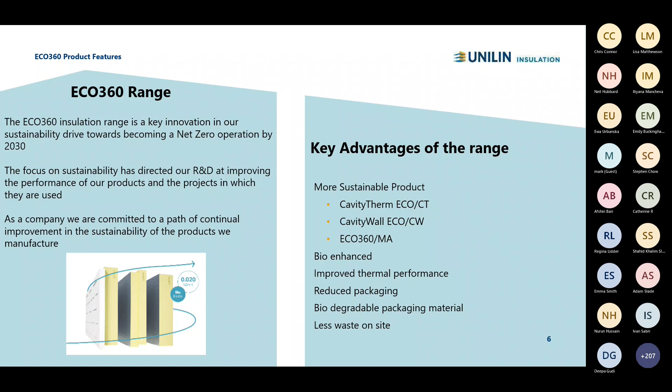We'll go into environmental product declarations in further slides when we link it through into embodied carbon, but these things can be sourced from a manufacturer. They must be independently third-party assessed. When you're using a life cycle assessment, an EPD must be available on the software that you use, and one of those examples is OneClick.

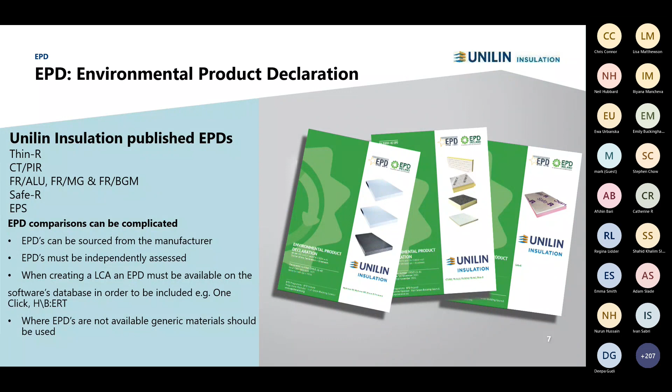OneClick are very similar to Revit, who won the BIM race. OneClick appear to be winning the race to house and be the platform for running embodied carbon targets. And where you don't have an EPD available, you must use a generic material score, and like most generic material scores, they're not very good.

So we'll go into Part L. We should all be fairly familiar with this. On the 15th of June of last year, it came into effect with a 1-year transitional period. It was 31% lower carbon emissions than previously in the 2013 regulations. And through SAP 10 itself, we've got a primary energy target, which is new to us.

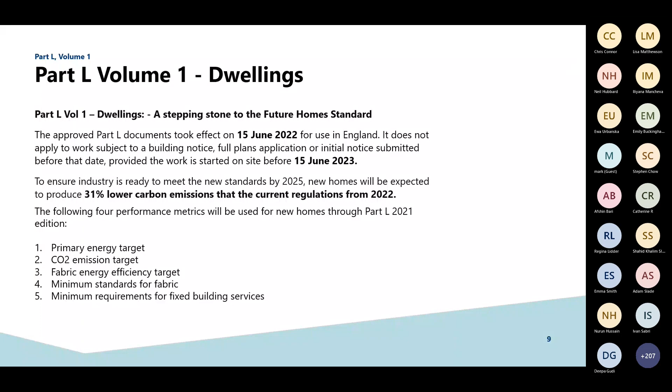We've got the CO2 emissions target, which has been reduced, the fabric energy efficiency target, which has been reduced, the minimum standards for fabric, and then fixed building services as well. So we'll touch upon those just now.

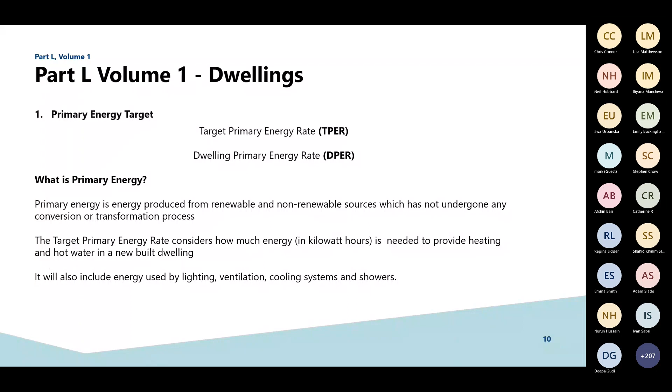So the primary energy target, so it's new to us. It's measured in kilowatt hours per square metre per year, and it's the primary energy used by a dwelling for its heating, lighting and hot water, and it can be influenced by things like the building fabric, and there's other factors like boiler efficiencies and renewable inputs.

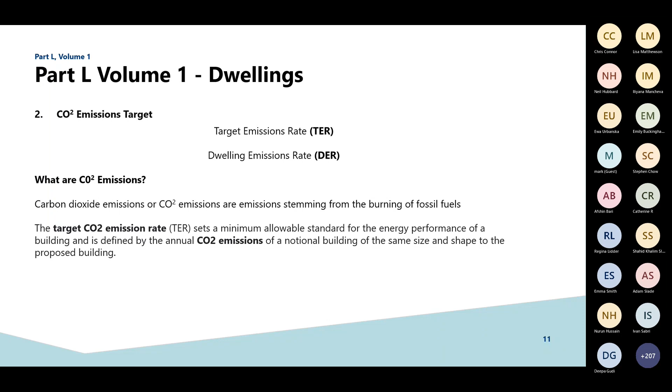We've then got the CO2 emissions target, which is measured in kilograms of CO2 emissions per square metre per year. Again, this has been with us since the concept of SAP from a compliance point of view. And again, I think we can all accept that reduction in CO2 is the primary objective when improving our building stock, as it contributes so massively towards global warming itself.

Then we've got the fabric energy efficiency standard. So this again relates to really the fabric first approach. As an energy assessor myself, and if there's any on the call, this really is the starting point when you start looking at SAP from an energy assessment point of view. You can then start to look at the CO2 and the primary energy, which again are a lot easier. So again, it looks at the energy, looking at the fabric.

So the more energy that's used to heat it, the worse it is. So again, if you can reduce that fuel consumption with the building fabric itself, and it doesn't matter whether that comes from a clean source or not, it still has to be paid for by a consumer, which is really relevant at the moment, obviously, with rising energy bills. So the less fuel to heat the building, the cheaper it is to run, and therefore it becomes a major step towards the elimination of fuel poverty.

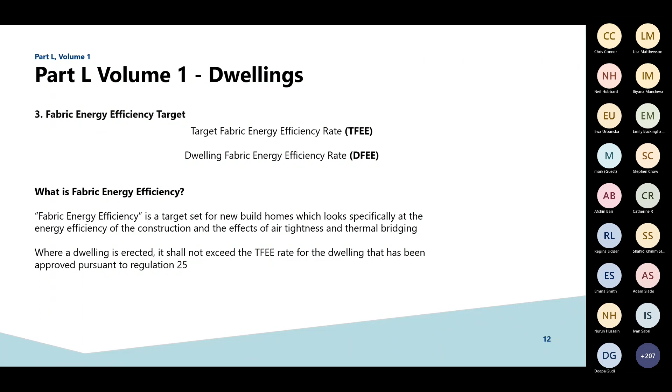So then you've got the minimum standards. So again, you can see they're listed on the table. These are absolute backstops, so I won't go through them all, but effectively they're in there as part of the recipe of SAP. If you've got something like a dormer cheek, which you want to look aesthetically pleasing, you can go as high as 0.26 in that as an external wall element. Very small area, it would be offset then against other elements. So by making the floor slightly lower, you can make the walls slightly worse. So it's a balancing exercise.

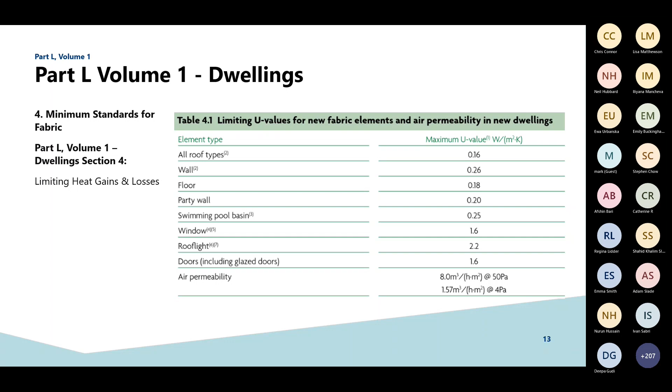And then you've got the fixed building services. So these include things like heating systems, where you've got boiler efficiencies and time and temperature controls, which are also set.

Y value of 0.05. So basically thermal bridging is measured in psi values, it's measured linearly. There's 44 junctions in total. So you've got things like the external wall ground floor junctions, lintels, sills, reveals, intermediate floors, eaves details. So all of these are measured linearly, and as a psi value, they get added together quite simply, and they form a Y value.

So we know that U values are fairly common. Everyone seems to know about them. They're repeating thermal bridges. The Y value is the non-repeating thermal bridges. As a total, it's a penalty that gets added in SAP in the background. So if you think you're achieving 0.15, but you've got a really high Y value, then your overall U value is a lot worse. The air tightness is 5, so that's remained constant throughout SAP.

We're still looking at mains gas boilers. Again, we're not quite ready to switch over, and I think that's more about getting the industry ready for commissioning and stuff. So we're still looking at gas.

We've then got wastewater heat recovery systems. So quite simply, they sit on the trap of a bath or a shower, take the waste and transfer the heat, coiled around what's going back into the system to heat it up. Therefore, it's like boiling a half-boiled kettle. Less energy is used to heat that water up. That then disperses down to the foul drainage.

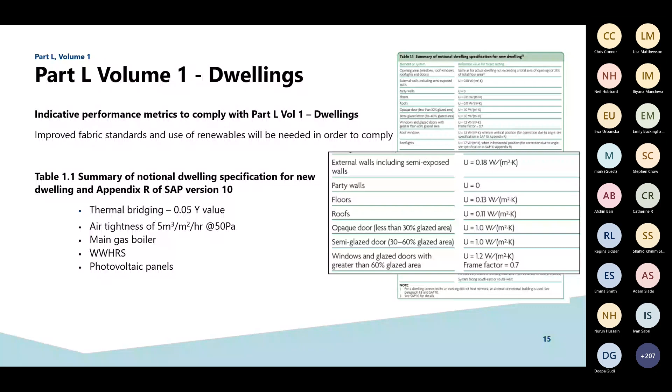But again, I must stress, from a fabric first point of view, when you look at the fabric itself with the BREL report, the Building Regulations England Part L that goes out as part of the SAP, if you fail the FEES, the fabric energy efficiency, after the building's been built, it's very difficult to comply. You can't use renewables or anything like that to offset. So again, it's about getting it right the first time.

So that introduces us to the Future Homes Standard. So what to expect for the future. The government has outlined their response. There is a consultation period now in 2023 with the legislation published in 2024 and implementation in 2025. We had 2013 in April 2014. We've had 2021 in June 2022. So hopefully these standards and targets can be met, but there is some history behind delaying them slightly.

So they are expected to be 75 to 80% lower than Part L 2013. They expect to do that through high levels of fabric standards and low carbon heating systems. It is subject to further consultation, but the use of gas, oil and LPG heating systems, as part of the removal of fossil fuels, will no longer be permitted. They will reduce the primary energy, CO2 and fabric energy efficiency targets, and then they'll review the minimum standards for the fabric and fixed building services.

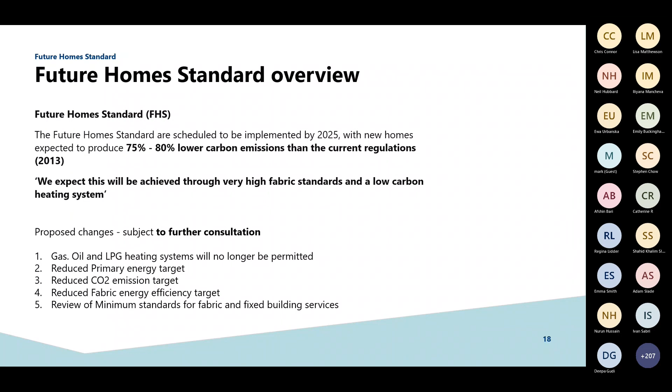So when they talk about the Future Homes Standard, they talk about heat pumps. When they mean heat pumps, they talk about air source heat pumps, which operate very, very well. The reason that they talk about air source over ground source and water source is it's a cheaper capital cost, not necessarily the most efficient overall, but it's a cheaper capital cost, and we tend to look at that first.

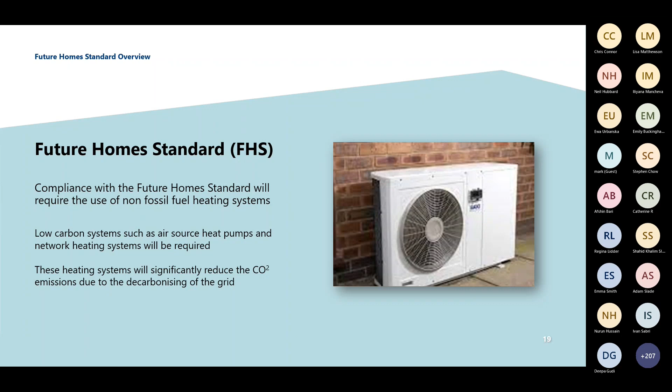So they have a draft notional specification. You've got a floor U value at 0.11, so slightly reduced. The external walls at 0.15, again slightly reduced. The roof remaining the same at 0.11, which is quite a significant challenge in both flat roofs and pitched roofs along the rake of the ceiling. You've got windows at 0.8, so going down to triple glazing. You've got doors that remain constant at 1, as does the air permeability.

The heating appliance going down to that heat pump system. The emitter type, so how the temperature is distributed for a room, goes to low temperature to suit the heat pumps themselves, which work typically well below 45 degrees. Natural ventilation, which remains standard, no PV at the moment, and no wastewater heat recovery.

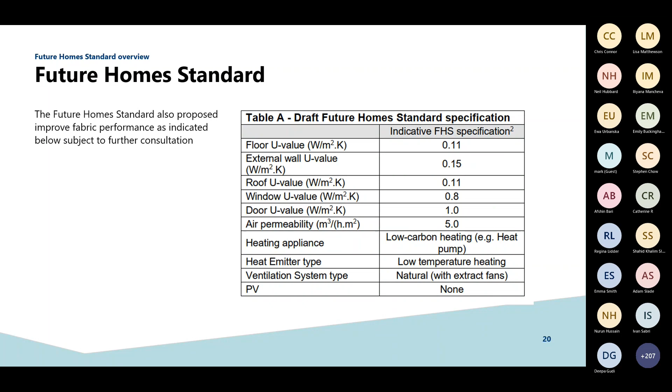So a comparison. I don't want to talk too much about zero carbon homes in 2016, which never happened, but Part L 2013, Part L 2021, and the Future Homes Standard of 2025 are relevant. So you can see that 0.13 to 0.11, if we're talking PIR, it's a 25 mil increase to get to 0.11. 0.18 to 0.15 is the same in PIR from a partial fill or a full fill point of view. From a roof point of view, we've gone from 0.13 to 0.11 in Part L 2021.

So we mainly insulate through the bottom chord of ceiling trusses typically. So that mineral fibre is built up, or if it's for a pitched roof, it can be up to about 400 mil, depending on where the insulation line sits. Windows, you've got going from standard double glazing to triple glazing, doors at 1, air permeability constant at 5, the low carbon heating system coming in, so air source heat pumps.

The emitter has already changed in 2021, and with things like retrofit, we're going to get used to retrofitting. So if we're going to be installing low carbon heating systems from a retrofit point of view, we have to consider how the emitters are working. Radiators have to be upgraded and perhaps even doubled or times 2.5 in size to accommodate the low temperatures that run through them, or underfloor heating, which works on that from day one.

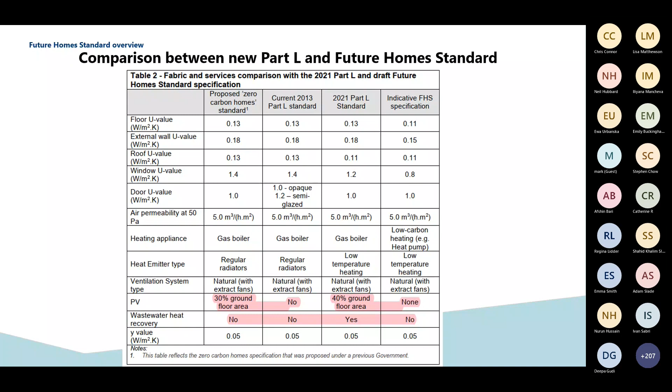The ventilation is standard. PV really only comes into effect in 2021. Whether we see it in the Future Homes Standard, it looks unlikely, but it will complement the air source heat pump and the electrics for everything else.

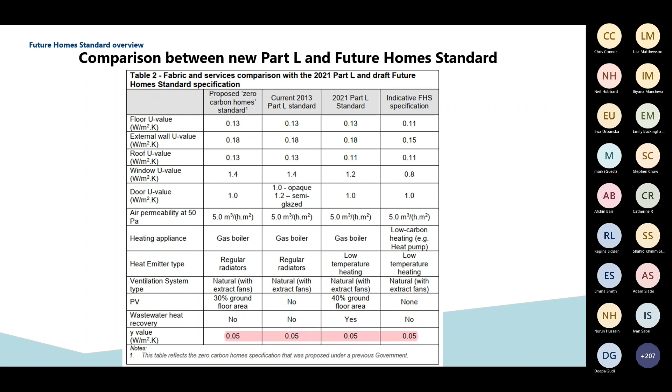There's no wastewater heat recovery beyond 2021, and then your Y value remains constant at 0.05, so a relatively good Y value. So again, looking at the details that we have available on the system, in a standard 2-story house with a truss roof, you can generally get down to about 0.03 or slightly lower. Just again on that, 0.01 or less is deemed passive house and no bridge.

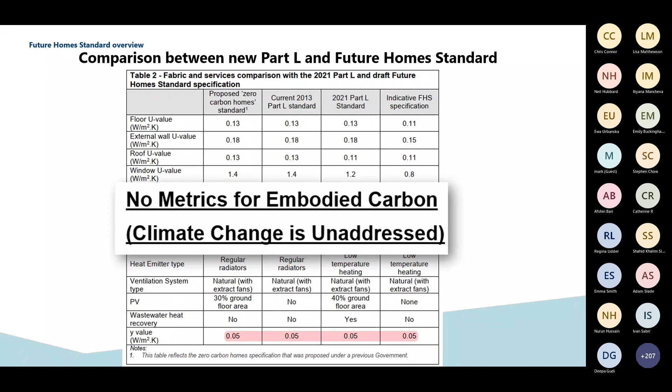So there's no metrics for embodied carbon. So we're always looking at an operational carbon point of view. So the climate change remains unaddressed. So again, that's an introduction to the operational carbon, which leads us into talking about embodied carbon. So introducing it as a metric.

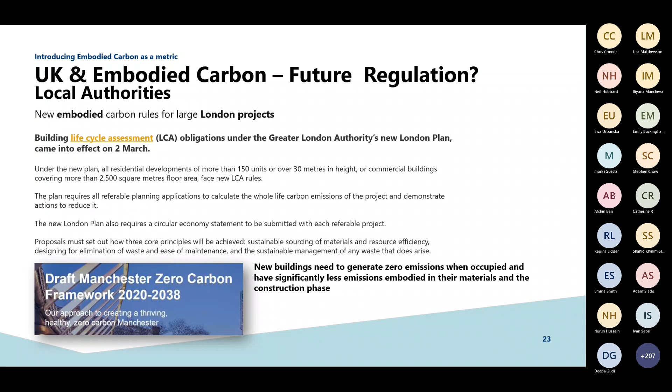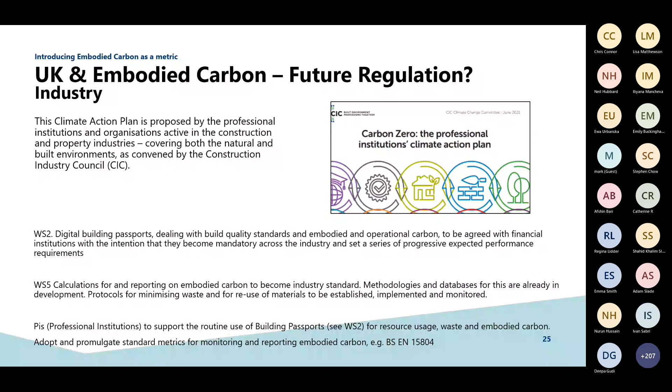I'll skip over these, but you've got the Greater London Authority, the Manchester draft local plans. There's the UK Environmental Audit Committee, and then you've got the Construction Industry Council as well. Everyone's talking about embodied carbon. I just came off the UK Green Building Council's presentation at 11 o'clock today. Government have committed to a Part Z regulation in embodied carbon. So again, it's a hot topic.

So they've gone on from this. They brought out version 2 in July of last year, and they were aligning themselves with LETI, the Greater London Authority, the UK Green Building Council, IStructE, the Royal Institution of Chartered Surveyors. So it's a collaboration. They were making sure they were getting this right. They looked at the future home standards from an operational carbon point of view to incorporate that within the method as well.

They have targets: residential, commercial, educational, industrial, mixed. So all of the targets change slightly depending on the use of the buildings. They've set out operational energy at less than 35 kilowatt hours per square metre per year. They've then got embodied carbon at under 625 kilograms of CO2 emissions per square metre. And this is one of the big changes that we saw in version 2. Version 1 had that at under 300.

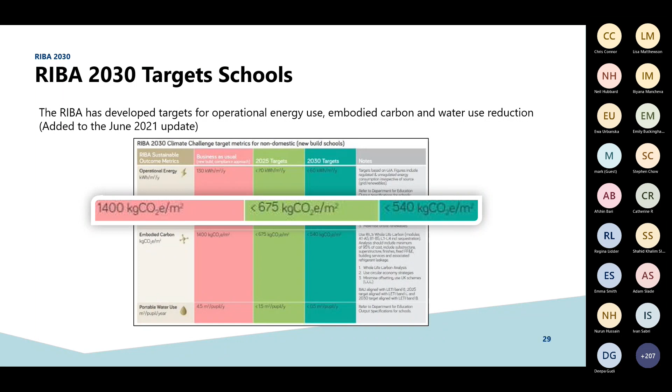So the delivery period itself: one thing we don't do when we measure SAP is look at any post-occupancy testing. It's not a compliance regulation. So things like insulation not installed, or things not working efficiently, could all be missed. So having this 1 year summer-winter cycle of data submission is really good. They are talking about making it longer, and it links to habits. So it's good finding out how somebody's using a system.

Perhaps they're using the air source heat pump in the wrong way, in which case it's not working properly, and therefore the energy efficiency isn't as set out. You can then educate somebody as to how to use it, and that typically takes a little bit longer. So having a longer period isn't a bad thing. Things like Passive House also have post-occupancy testing, but typically with a SAP compliant building, you wouldn't expect to do that.

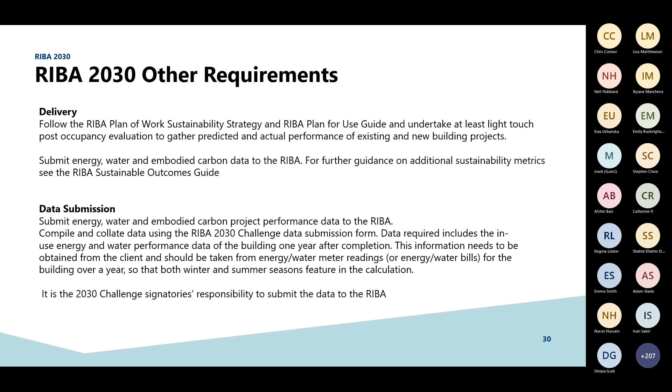So just looking at operational energy and the definition, it's measured in kilowatt hours per square metre per year, and it can be taken from confirmed energy bills or more advanced metering systems. That's the easiest way. The RIBA Climate Challenge does allow you to use both grid and on-site renewables. So for example, you can use PV generated on-site to meet those targets.

And again, whilst we're talking about them, we're talking about here net zero. So we're talking about offsetting measures that are set out within the challenge. And you wouldn't be offsetting.

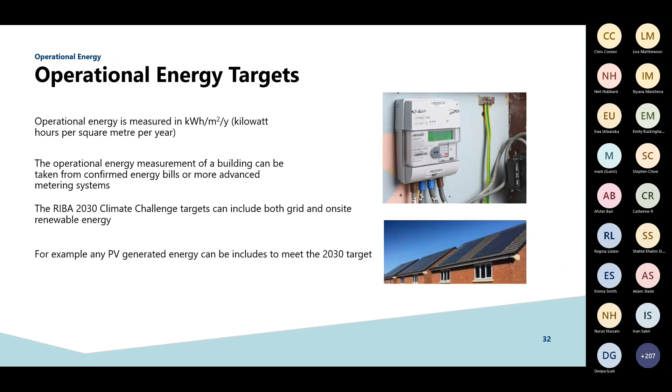So again, we do go on to say, as part of the RIBA Sustainable Outcomes Guide, effectively, if you're looking at a design stage, you can use things like SAP or PHPP. So SAP is obviously what we'd use from a building regulations point of view. The PHPP is the Passive House version. Again, this is just at design stage to estimate the demand, but they do go on to say that in the case of space heating, that demand should be between 15 to 20 kilowatt hours per square metre per year allowed for in the design itself.

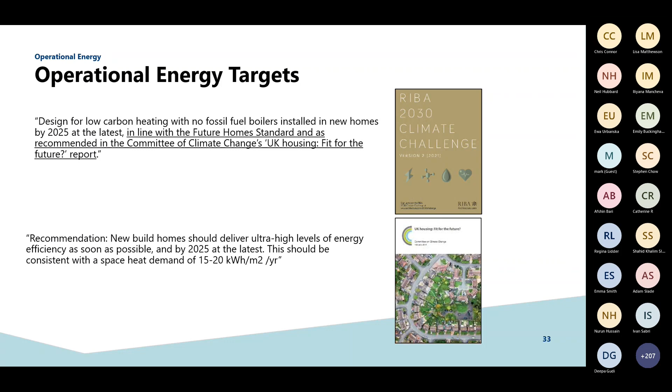So just looking at embodied carbon and embodied energy definitions, there's a common misconception when we look at embodied energy and embodied carbon. So embodied carbon itself looks at the sum of CO2 emissions associated with a product or service, as per the below there, looking through raw materials, manufacturing, packaging, distribution, use, disposal in that cycle. We quite regularly see that cycle linked to embodied energy, though, which it doesn't relate to, which is the sum of energy in kilowatt hours to produce a product or service.

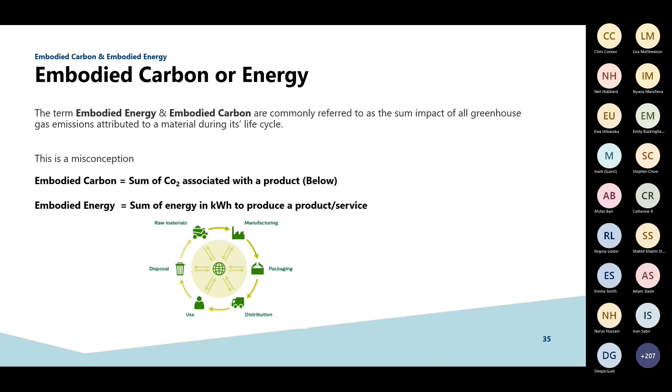But just to understand embodied carbon emissions, they're generated from the processes that are associated with sourcing materials, fabricating them into products and systems, transporting them to site and assembling them into a building itself. They also include the emissions due to maintenance, repair and replacement, and they include the final demolition and disposal stage.

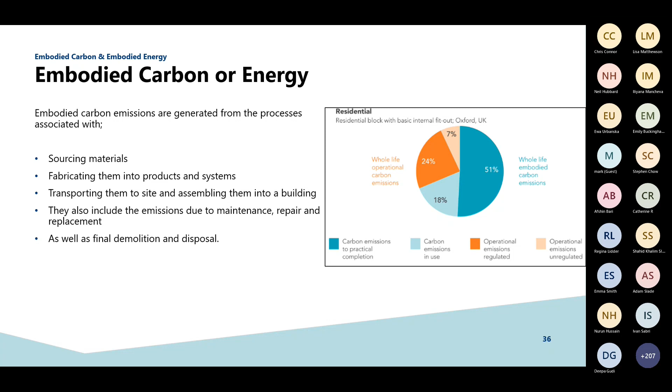Ordinarily, if I was with you guys right now, I would do a show of hands. I like to interact. It's such a good topic, but such a long amount of slides. But what I would say is, forget your businesses for a second. As an individual, does anyone on the Teams call know what their carbon footprint is? And I don't expect anyone to know that entirely accurately, but an idea.

So again, there's various apps that you can use. The WWF have one, the Tree app have one, and it's a way of simply understanding where you sit on your carbon footprint compared to the rest of the UK and compared to the rest of the world. It's just one of those things, when we talk about a climate challenge and all of the obstacles in our path, they've actually calculated, quickly, it takes about 3 or 4 minutes to calculate where they are approximately. So it'd be interesting if anyone on the course has done that, or during my presentation, whether anyone does it. Mine's 11.07, just to give you an idea.

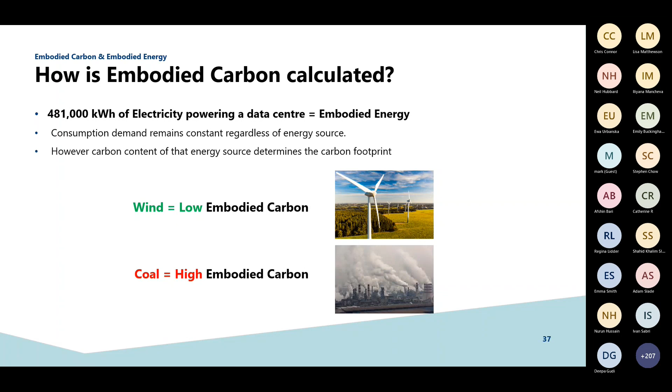As a responsible manufacturer, we're constantly developing ways for recycling our products, but as an example, you take a roof timber out of an existing building, and that gets chipped down, gets put into being something else. That's cradle to cradle.

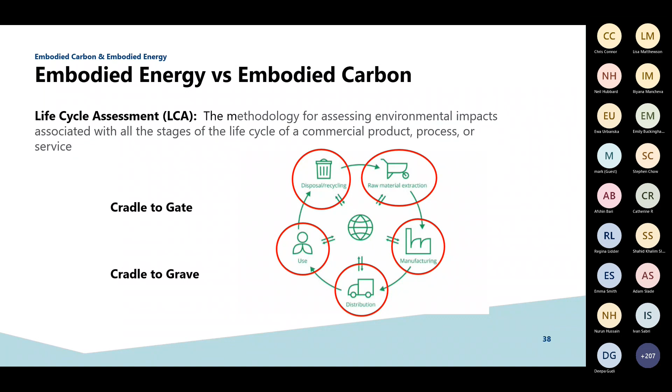When you've got cradle to cradle certified, that goes beyond that stage. So the best example of that is like a piece of stone that goes into a wall. It can come out of a wall at demolition stage and go into another wall in the same process without having a process in between to change that product itself.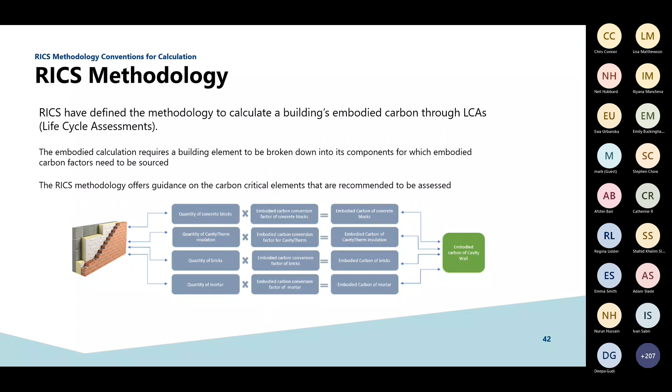You times them by the embodied carbon conversion factors in the EPDs, the GWP score, and that equals the embodied carbon of that element. You then add them together, and that's the total embodied carbon element of the wall. The categories that you have are then added together, and they're divided back by the gross internal floor area to give you the total embodied carbon. So again, you can see substructure, superstructure. The components are then split down into subcategories.

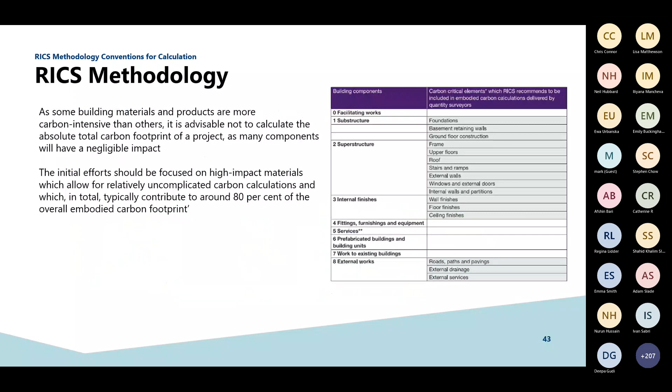So we're just going to have a quick look at LETI, referred to as the Low Energy Transformation Initiative, previously London. So the biggest mistake that they made with that was the word London. But again, this is more open. I'm going to mention the name again, but RIBA is restricted. It's restricted to architects and practices under RIBA.

LETI is open to engineers, planners, academics, housing association professionals, and so on, and CIAT and MCIOB. So they're more open from that point of view. They're not restricted to London, and obviously they do collaborate with others as well. They've split their carbon guidance down into two targets. You've got upfront carbon and then total embodied carbon.

So upfront carbon is A1 to A5, up to practical completion. This excludes sequestration itself. But you can see the targets are banded there. It looks a bit like the Green Guide used to with those targets. So there's set ways to improve those targets as well.

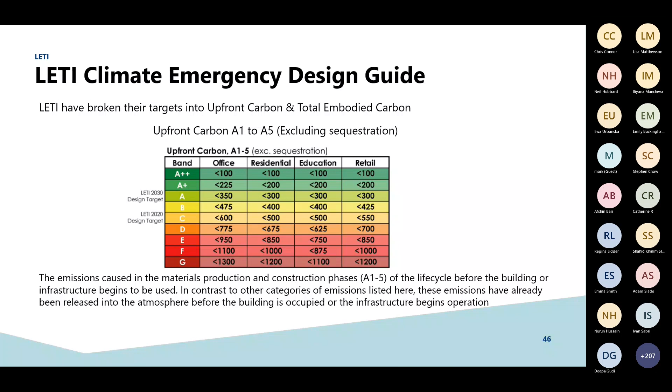Whereas you've then got the whole life embodied carbon stage, so A1 through to D, through to recycle, which can include sequestration. And you can see where the RIBA Climate Challenge sits. It sits at a band B there, under 625. As I said, it was previously under 300 as an A+. So there's obvious room for improvement there that can be made. And that's going to happen with all the good work that the industry is doing from a manufacturing point of view, going back into this from an EPD score.

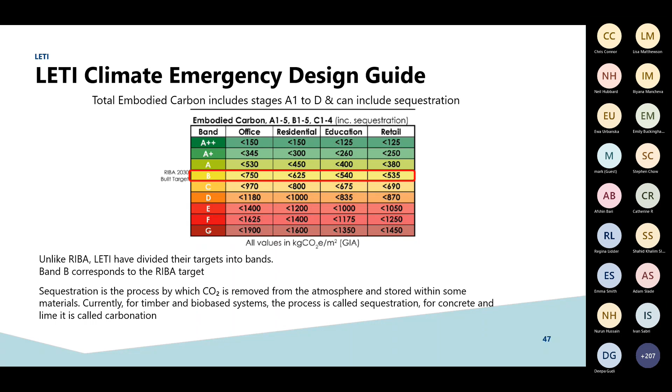So we'll have a look at those environmental product declarations now, EPDs as we call them, and their role in calculating embodied carbon. So they do measure the environmental impacts of a product for its life cycle. They're based over 100 years. It's done to EN 15804. It was A1. It's been changed to A2 in July of last year, which we're fully up to date on.

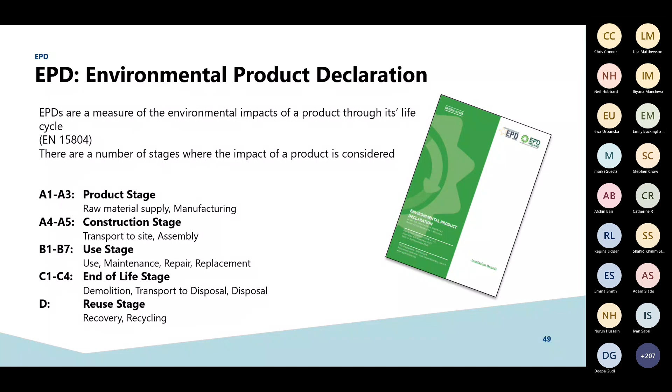And there's a number of stages that we talk about. So we talk about A1 to A3, which is the product stage, which is raw material supply and manufacturing. A4 to A5, the construction stage, so transport to site and assembly. B1 to B7, the use stage, which includes maintenance, repair and replacement. You've then got C1 to C4, which is the end of life, demolition, transport to disposal, and then disposal itself. And then a D stage, which is the recovery or recycling stage.

The main thing that you look for in an EPD is the global warming potential. So previously, before the EPDs took over from the Green Guide at the end of 2021, effectively they had a GWP score of less than 5%, and that typically looked at the blowing agent only, whereas it looks at the whole life cycle assessment now.

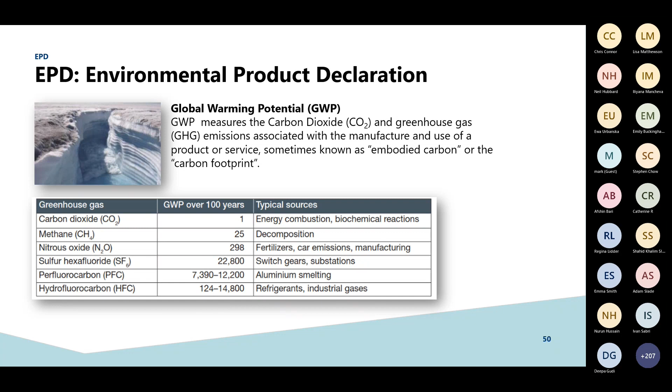So the GWP measures the carbon dioxide and greenhouse gas emissions associated with the manufacture and use of a product or service, sometimes known as embodied carbon or carbon footprint. So over 100 years, you've got a GWP score there of 1 for carbon dioxide. Things like methane, so again, rotting timbers or food or something, would be 25. You then got hydrofluorocarbons in refrigerants from 124 to 14,800. So there's a lot of work to be done there, and we'll talk about refrigerants in a minute when we link them back to air source heat pumps.

It also looks at the ozone depletion potential, the ODP. So previously that was a figure of 0%. Again, these figures are incredibly low. The decimal points move a lot, so 0.00000 before you encounter a number. So they are incredibly low, but they look at the ozone depleting gases causing damage to the stratospheric ozone layer, reducing its ability to stop ultraviolet light entering the Earth's atmosphere. So the GWP is the main thing you look for, but something else that might be known is the ozone depletion potential.

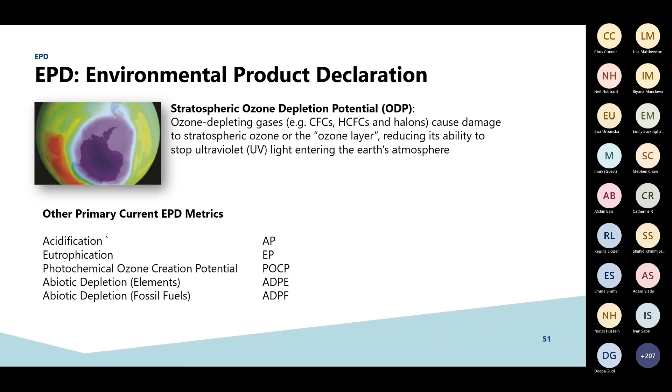Again, various questions when you look at EPDs, they're not that easy to interpret. They're not like a BBA certificate itself; they're specific to materials. They're specific to the manufacturer location of those materials. So you can't use an EPD score that comes from another factory when the materials come out of a different factory, because it all links back to processes within that factory itself and the efficiencies. They're not linear, so you can't readily change a thickness by dividing it back and multiplying it by the new thickness, which makes it complicated when people use thicknesses within an EPD that you can't buy in the industry. So therefore, the thickness is important when you do a comparison.

They tend to have an expiry over 5 years. So to get an EPD with a 5-year valid period, you have to have a year's worth of manufacturing data. You can say that you've got 90% recycled element within your product, but unless it's demonstrated within an EPD, it can't be used. You've got to go back to what an old EPD would say. So again, there's lots of good work going in. They cost about £9,000 per EPD, so it's quite a significant cost to doing them when you've got quite a vast range. So again, there's a strategic approach.

So you might not wait to the 5 years, but strategically, depending on what your maintenance plan is within your facility, perhaps you plan on putting a lot of solar on your roof. You wouldn't really want to put your EPD out until that work had been done, because it will impact things that go on. So again, there are people out there like ourselves that are doing significant work in the background, which will significantly improve the EPD scores.

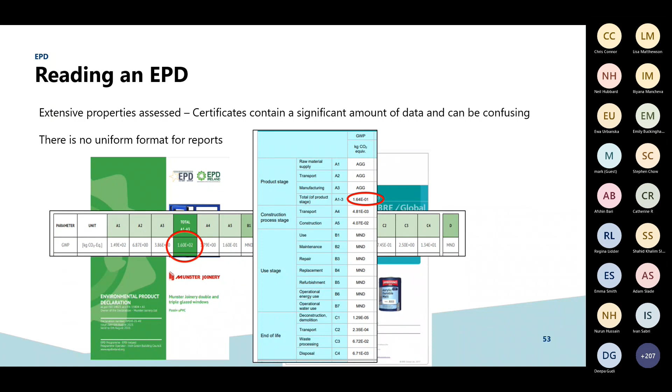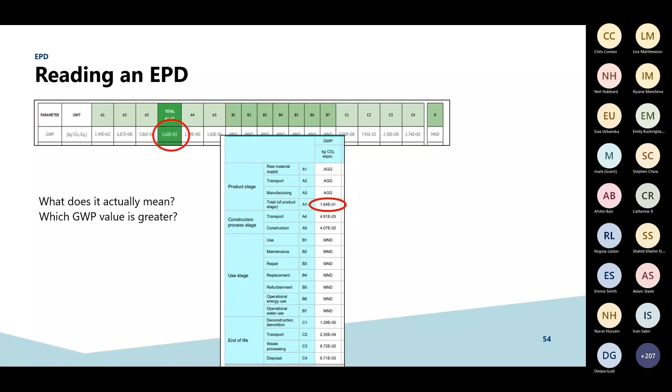So reading an EPD then, just looking specifically at A1 to A3, we've got two scores. I'll skip to the next slide. We've got two scores, which is 1.60E+02 and then 1.64E-01. And it's about the movement of decimal places. Normally I'd have a little bit of a guess around the room, but one's 160.2 and the other one's 0.164. It's about the power of and the moving of decimal places. We're looking at the GWP, but it's because of the ozone depletion potential, which has got that significantly low score, that's used.

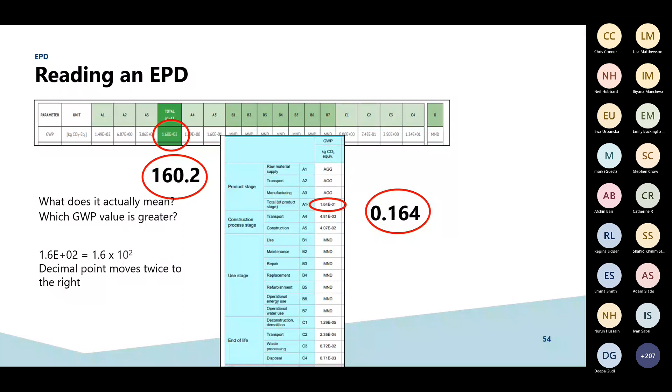So I've spoken to people like OneClick, and I've said to them, isn't it far easier to demonstrate the actual score, seeing as that's the most significant thing we're looking at, rather than making it overly complicated? But again, that's not going to happen. That's the way they're doing things at the moment. And it just makes them that little bit more difficult to read and understand.

So it brings us on to an independent assessment on embodied carbon that was commissioned. We did this with XCO2, who have backgrounds in engineering, architecture, and environmental science, and effectively what they were commissioned to do is look at the life cycle assessments in accordance with the RIBA Climate Challenge over 4 dwelling types: a detached, semi-detached, mid-terrace, and apartment block. And the aim was to see if we could achieve the RIBA Climate Challenge using traditional construction methods.

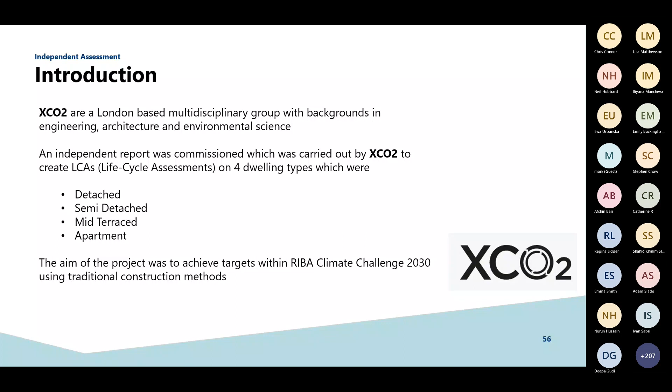And we started this process on version 1. So we were looking at under 300. And obviously when version 2 came out, it was a lot easier to achieve, but still quite onerous at the same time. So there's various standards that this assessment was created to, which again, you'll have a copy of, should anyone wish to look into it.

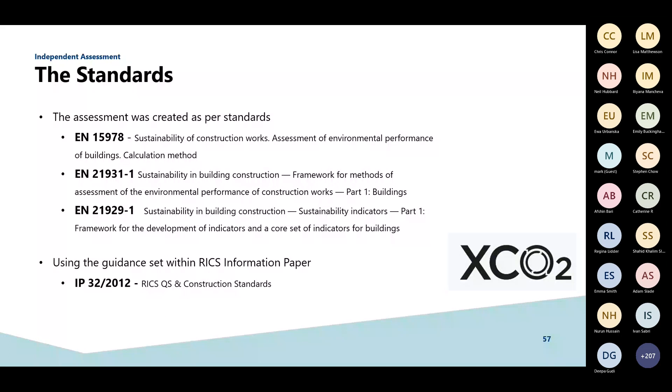There was an independent quantity surveyor used to quantify materials, and in accordance with both LETI and RIBA criteria, the landscaping and pavements were excluded. And again, we were interested in the building, not necessarily its surroundings at that time, because the building was constant.

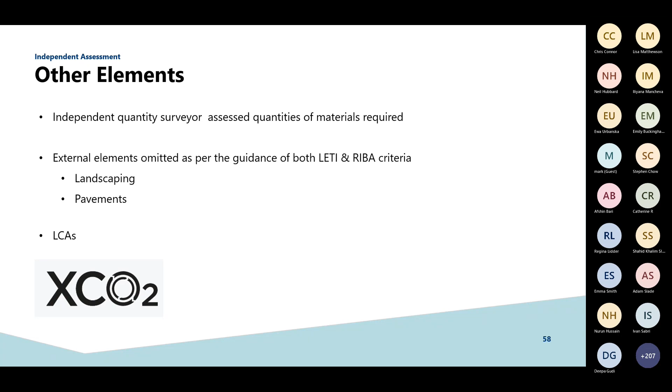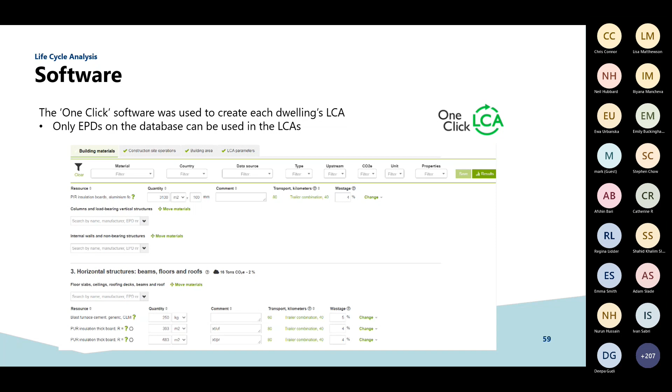So again, we worked with OneClick, and there are other softwares and databases that are available, but we worked with OneClick on the LCA. For anyone that's familiar with things like SAP 10 or SAP 2012, it's quite a simple process, inputting measurements, drop-down boxes, finding information. It's just making sure you find the right information, like you would find the right boiler. You have to find the right EPD to be able to be used.

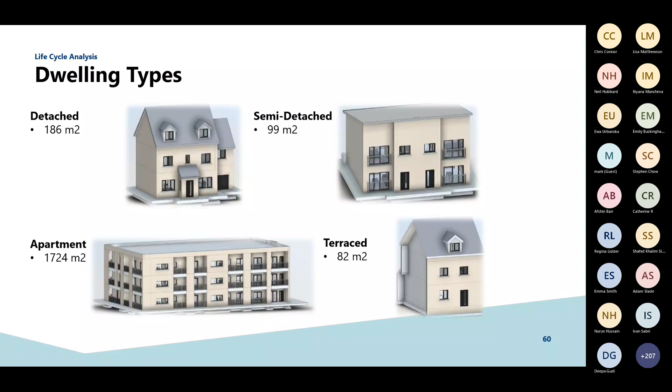Again, we're not claiming that we're architects here or designers. As you can see, these aren't aesthetically pleasing, but we weren't picking easy boxes either. So we had a detached house there, a semi-detached terrace block, an apartment block, and you can see listed there the gross internal floor areas. Similar to SAP, the higher the gross internal floor area, the easier it is for compliance. So you will see a trend when we look at the scores in a minute.

So the specifications were basically a default future home standards. So we took the operational carbon of that and looked at a specification that would meet that. We then improved the future home standards using improved EPDs with ours and others for recycled elements. We then looked at more of a passive house, so an MVHR passive heating design, and then electric panel heaters.

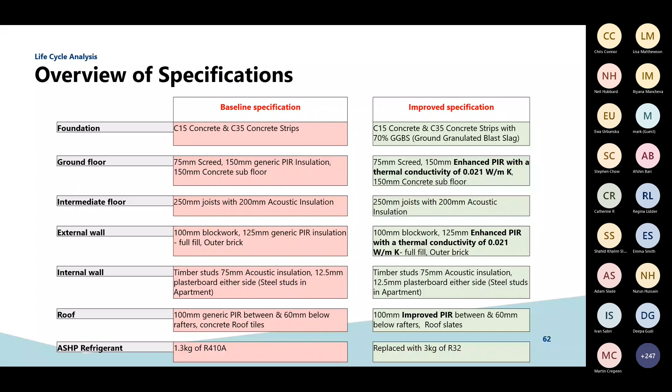So we looked at direct electric heating, which, as the grid continues to be cleaned up, is going to become more and more likely. I'm not wanting to see things like night storage heaters, but similar things. Again, from a compliance point of view, the more and more work that goes into the grid. So there are a baseline specification and improved specification, you see highlighted there, and just an enhanced refrigerant that was used as a replacement as well.

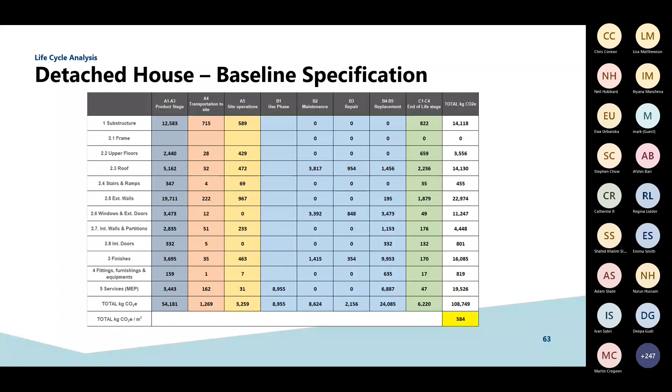So again, you go through the stages, A1, A4, A5, then through B1 to B7, C1 to C4, and then it effectively comes out with a total embodied carbon as you go down through. There are some fairly high material scores there, but there's some fairly big elements to them. And we come in with a score of 584, so slightly below target of where it needed to be.

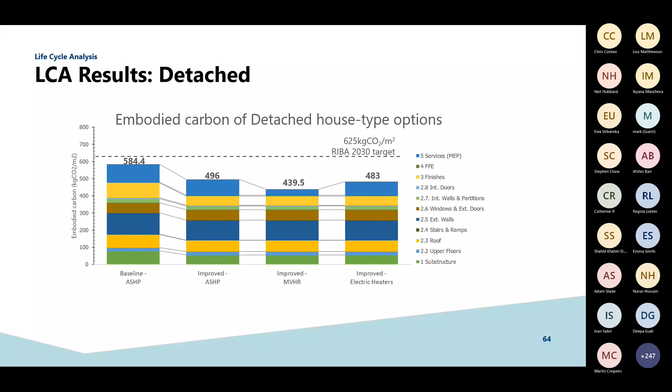So there is a common theme throughout these. So you've got the detached house, and it's always the baseline being the highest, then the improved, then the electric heating, then the MVHR. And you can see listed down on the right-hand side the elements as they go into them, color-coded.

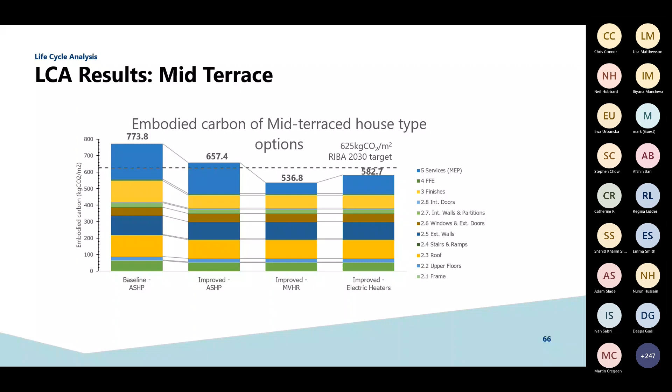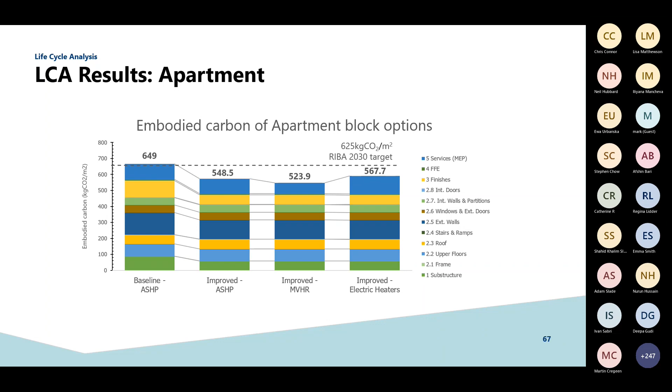So again, mid-terrace, slightly failing on the embodied carbon on the improved, and quite a lot on the baseline, and slightly failing on the baseline of the apartment blocks. There is a lot of good work going in. So if this same exercise was done in, say, 3 years' time with the same manufacturers, with EPD scores expected to lower from those manufacturers, they are going to be significantly reduced. So we will see them naturally come down.

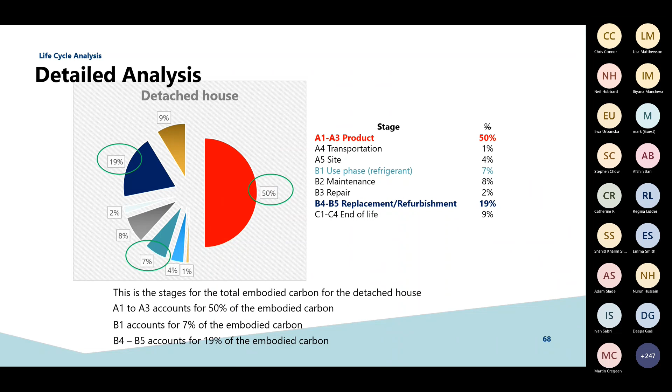So again, you can see the most contributing factors there. There's some good work that can be done. So high scores at the moment are bad. There is going to be a lot of good work. There are things like, I think EnviroBlock had the first cement-free concrete block with an EPD. So again, that will be significantly reducing the concrete block element. But again, it's highlighting stages that you can see there. And it basically relates back to an air source heat pump.

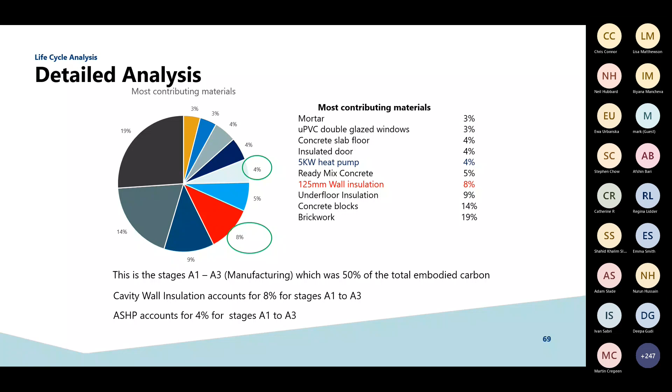And I don't want to try and confuse people or try and make people think differently about air source heat pumps. What the analysis is showing over the RIBA Climate Challenge is based over a lifespan of 60 years. So what they're saying as part of the replacement and maintenance is every 17 years, I think, the air source heat pump has to be replaced according to the criteria. My point, again, it's showing that 19% of the total embodied carbon is attributed to an air source heat pump, but that's mainly due to the hydrofluorocarbons.

Again, there's lots of good work being done there. We have to use a life cycle assessment to work on what's going to happen, but can we predict what's going to happen in 17 years' time? It's not going to be replaced with a like-for-like air source heat pump. That is 100% sure. In 60 years' time, the building would hopefully still be up, for one. But again, the technology is going to have changed significantly.

So it is a bit harsh to say that the attribution is 19%, because in reality, in 17 years' time, you're probably going to have something that's got a really, really low GWP score and can be fully recycled, for instance. So again, I don't want to try and mislead people with what this is trying to say.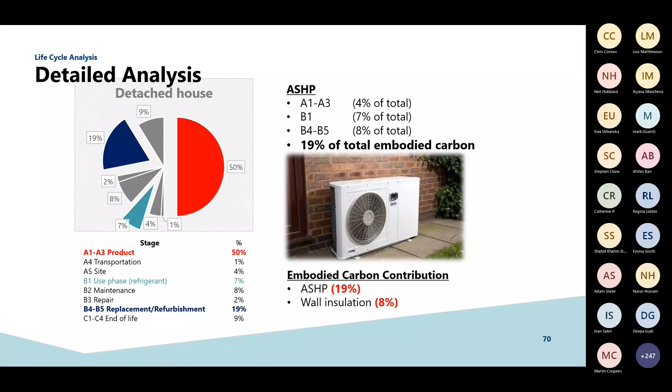We had a look at masonry versus timber frame, and again, we're independent. We sell to masonry, we sell to timber frame, we sell to all sorts of various different weird and wonderful structures beyond this as well. But again, you can see there, it's about using materials that are available now. So everything that was done was what's available in the marketplace now. What are people building out of? It's no good going to Finland or Germany and getting the best EPD of a product that we're not using.

So again, using the EPD scores that are available with the materials that we're buying now, there is an improvement from a timber frame point of view that we saw. It was 2.85% on the semi-detached, slightly more on the detached, slightly less on the mid-terrace. So again, it is better, but it's about choice. We're not telling you what to do here, what to use, we're just telling you what we found.

And again, if you're a bricklayer, you're going to want to build in brick and block. If you're a chippy, you're going to want to build in timber frame probably. You're a national house builder, it doesn't matter as long as it's cheap. So again, it's about choice.

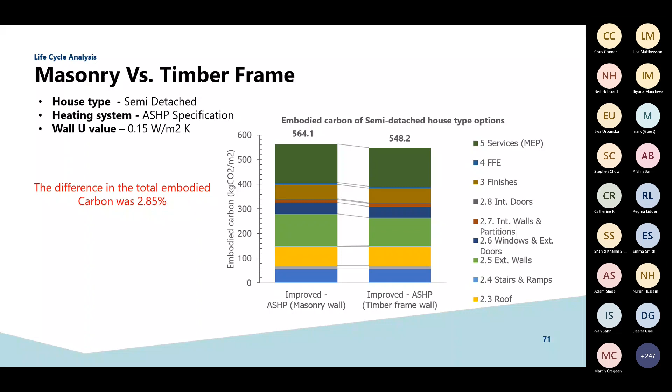There's lots of considerations. It is a moving target to a certain degree. I talked about EN 15804 A1 being changed over to A2 in July. Again, we are current with that. Data is changing as things go. Standards for EPDs, again, you can see there as calculated. So it is an ongoing thing. It's something that we're working with constantly.

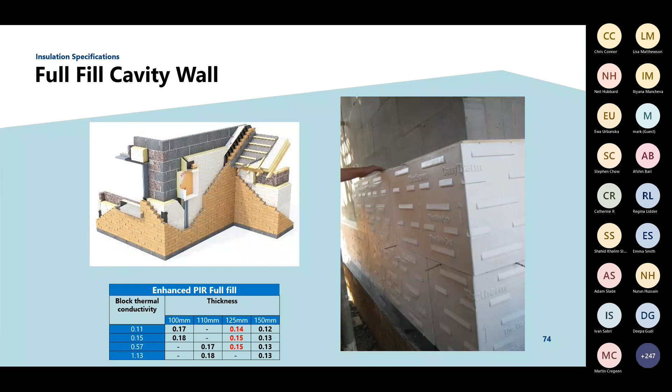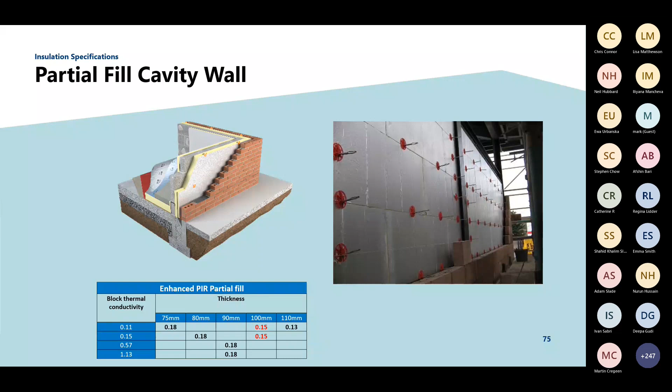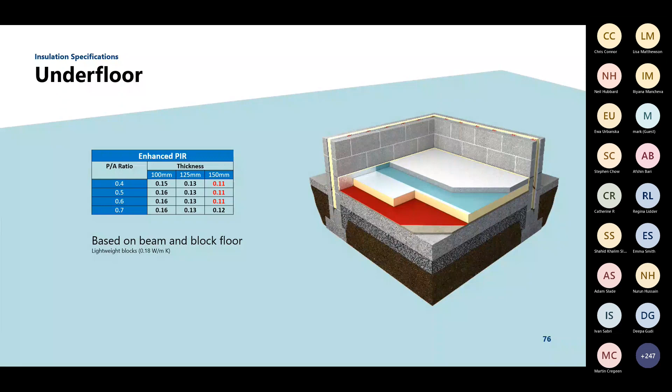The way in which calculations are run are also slightly different. You need the resistance of the makeup of a wall or a floor or a roof. Typically on a floor, you'd also need to know the exposed perimeter and the gross internal floor area. So if we ever ask for a drawing or the P over A, that's why. We just need that calculated. Exposed floors change, they're just a resistance, and therefore you just need to know the makeup and its conductivity to work out that resistance. Most insulation through the bottom chords are mineral fibre as a build-up. We also do crawl boards, PIR with OSB over the top for plant, which reduces the thermal bridging.

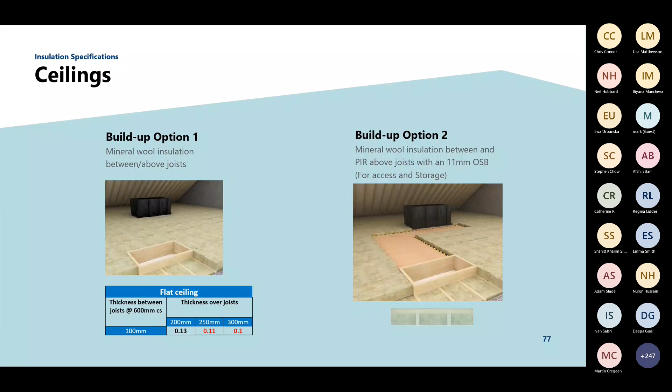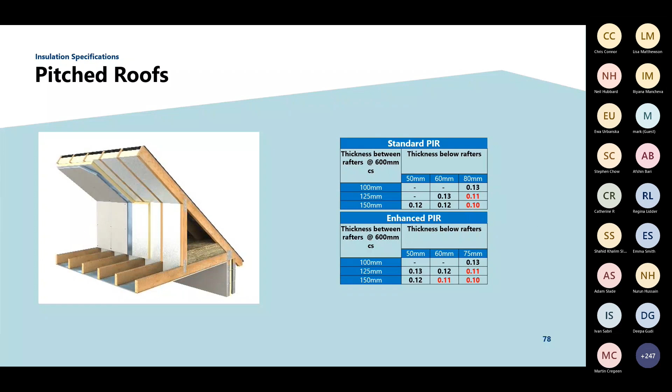Pitched roofs: so again, similar to the resistance that you need for other elements, we need to know the centres and the depth. And again, we would always recommend if we're doing insulation between that you also insulate above or below as well to mitigate that thermal bridging. Or of course, you could do it completely over the top as a warm roof as well.

So again, this is a RIBA approved presentation. As part of the RIBA approved presentation, they asked us to talk very briefly about fire. Part B of the building regulations changed on the 1st of December, which limited buildings in England to 11 metres from a combustible insulation point of view. Again, that was brought down in line with sprinkler systems.

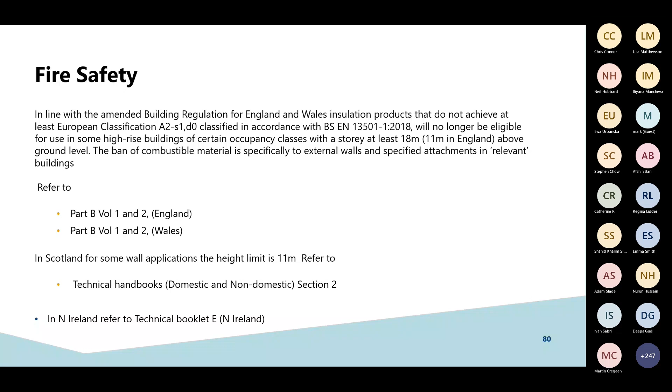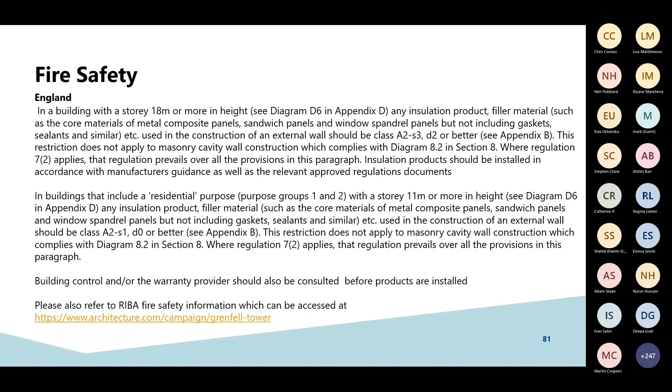So again, various documentation. Obviously, you can look at Part B itself and the diagrams of how that actually works: from the external finished floor level up to the highest habitable finished floor is how you measure it. So it's not from external to gable height or anything like that. But again, this is all outlined in Part B of the building regulations. And I'd just say if any of the information is unclear, please contact a specialist or a fire engineer who would be able to give you more information.

So the learning outcome. I know I've gone through this fairly quickly. I'm conscious of time and I probably would have wanted to spend more time, but again, I'm conscious of everyone's time and getting some questions in. So there is a learning outcome and the learning outcome is the same as the agenda. So hopefully you've learned what we were meant to go through.

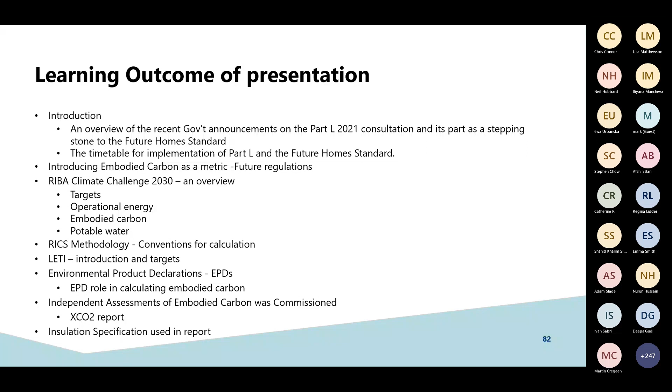Great, thank you so much for that, Martyn. It's really interesting, and I appreciate that the talk was originally tabled to be, I think you mentioned it at the beginning, was it over an hour? Yeah, so it's basically meant to be within an hour, so 45 to 50 minutes with a 10-minute Q&A. But we've had the presentation go on for a lot longer because there's a lot of slides. It depends on the interaction, so we can take as long as people need effectively, or we can rattle through it like you see I've done. But it's a very data heavy, very interesting topic, but one that's relatively new. Most definitely, yeah, really interesting.